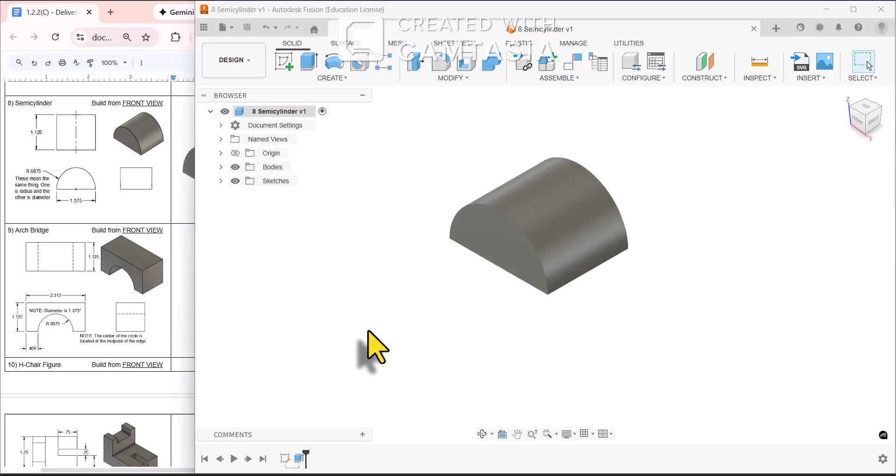Hello and welcome back to the 9th video where we're going to make this arch bridge. This one's going to have a few more interesting tricks for us to learn. So we're going to close up this semi-cylinder and we should have a new untitled document to work with.

So I'm going to build this from the front view, so create sketch and choose front view. And what I want us to do is pan a little bit so that I have this big area to work with. We're going to create a 2-point rectangle to start.

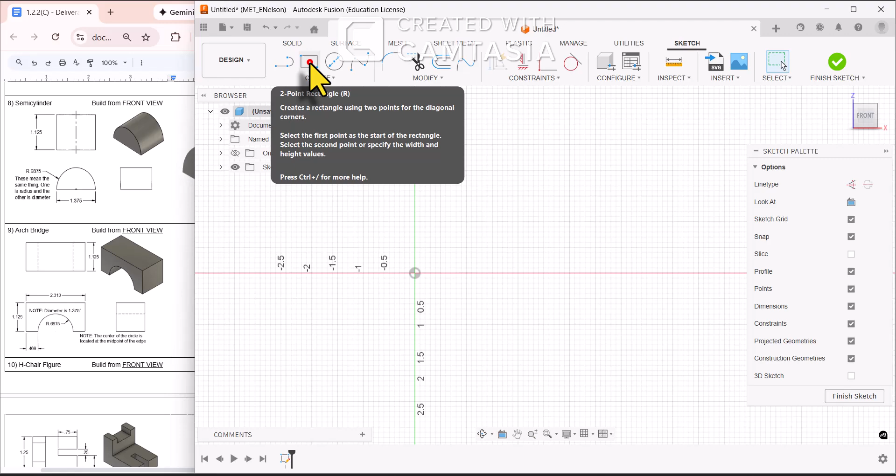Just kind of draw them randomly. And we're going to create a sketch dimension. This top is 2.313. And the left side, which would be the height of this shape, is 1.125.

So far it looks great. What I want to do now is choose the center diameter circle. And we're going to follow this edge until I get to the midpoint. The midpoint is when it turns into an X with a triangle above it. I want you to click and just randomly drag it out and click again.

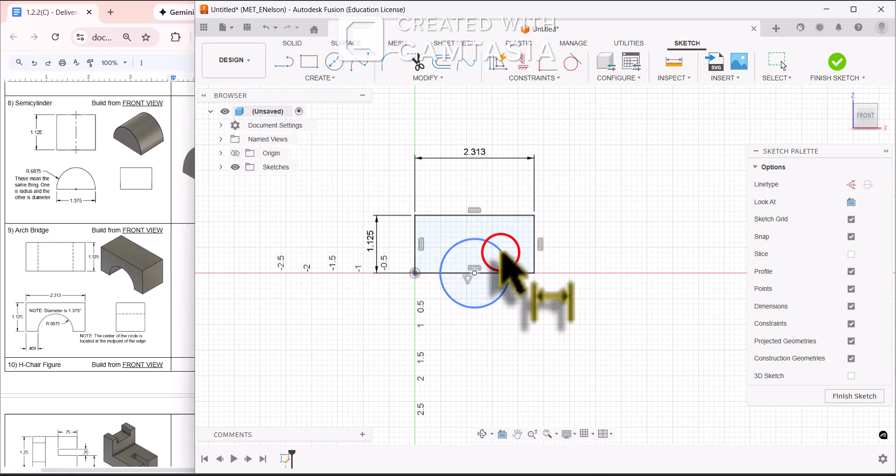I'm going to create a dimension. Choose this. And that diameter, I have a note here, the radius is 0.6875. The diameter is 1.375. Press enter. I got that right from my note, or you could take your radius and double it. What we need to do though is trim this out.

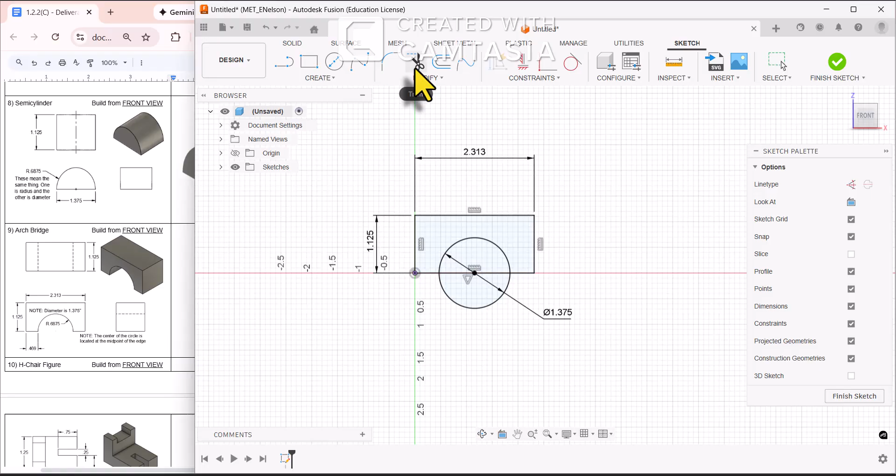So take the scissors and we're going to cut the bottom and I'm going to cut this middle piece. But what you notice when that happens is I don't get to keep the shape.

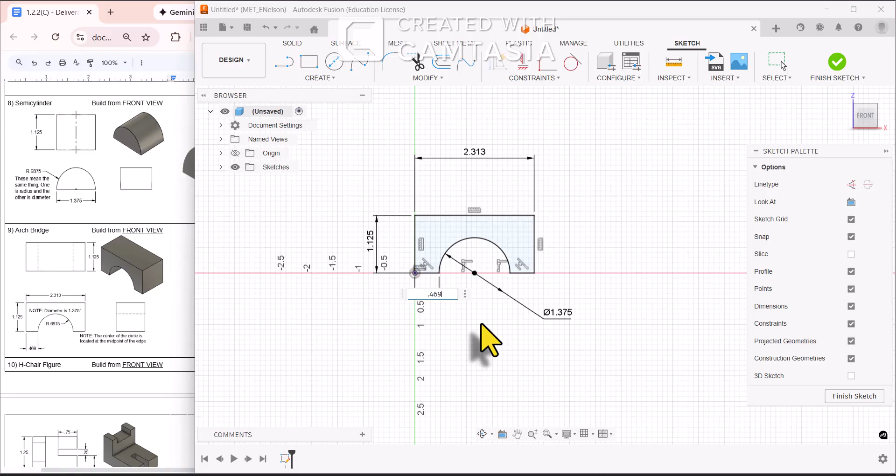So I'm going to go back to create sketch dimensions and I'm going to choose this point and then I'm going to choose this point and go down and I'm going to type in 0.469, which is what it shows right here. Press enter and now every edge should be black.

That means it's fully constrained and we can extrude. If you don't see this, pause the video and grab Mr. Nelson. Alright, finish sketch, press extrude, and this has a depth of 1.125.

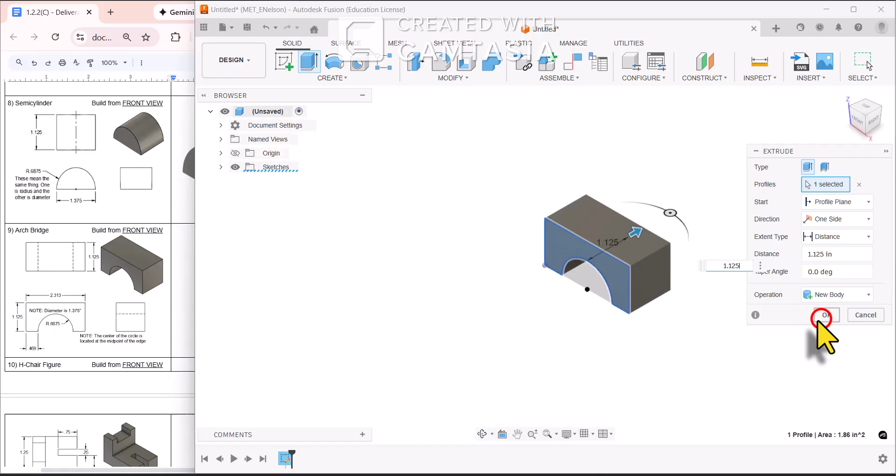And there it is. I'm going to give it a little bit of color, physical material. This time I'm going to choose a metal, and let's choose brass. Click, drag it on, and close.

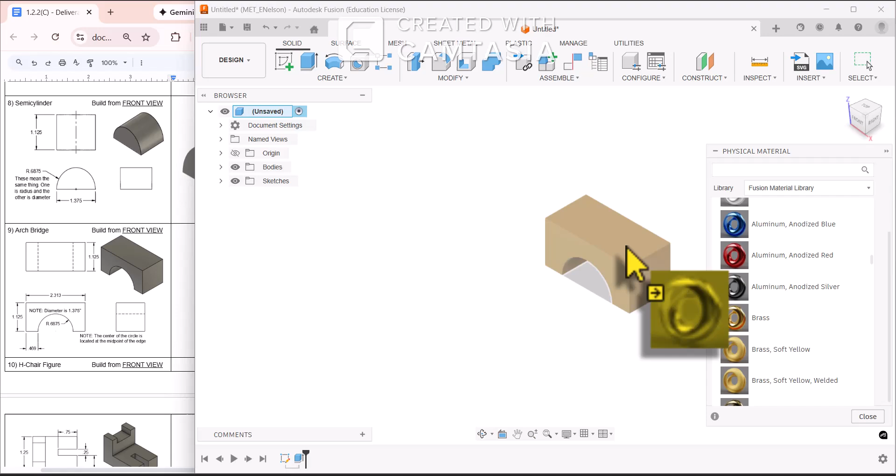The difference between physical appearance and material is that now this has all the properties as though it was made out of brass, versus the other one, it's just painted or looks like that color.

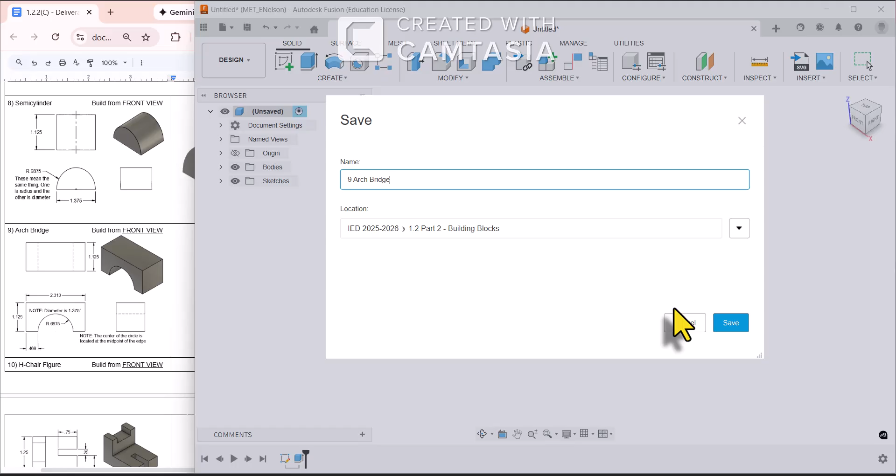Alright, let's save this. This is number 9, Arch Bridge. As all of these, it's saved in 1.2 Part 2 building blocks.